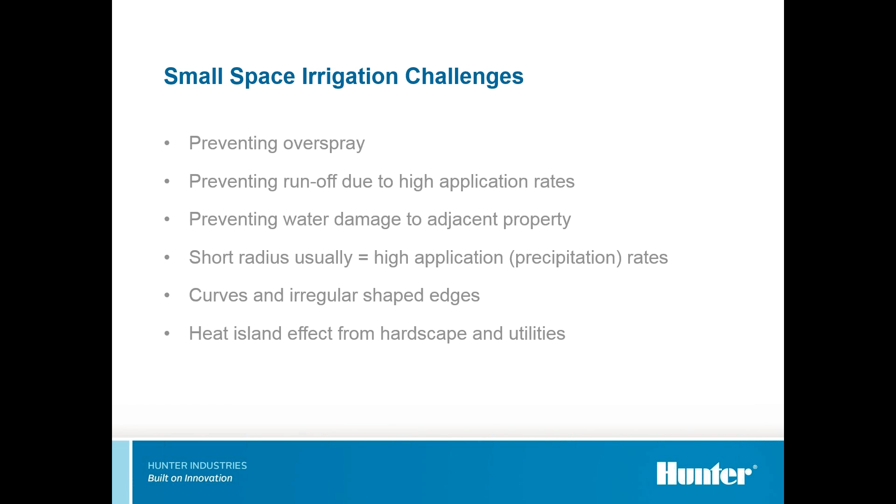And then the other thing is, when you get stuck into these small planter areas, I'm going to show you a few slides that you get this heat island effect where the hardscape heats up and starts radiating heat, and that can actually wick water out of your planter area. So we'll talk about that. Drainage issues, oftentimes, the water from the surrounding hardscape starts to collect in your small landscape planter area. So you got to make sure we got good drainage, and then how do we irrigate off of that?

Lots of equipment, because when you get into small spaces, you don't really have room, but you tend to have a more dense application of heads, so you end up having to fit this stuff into small spaces, and that can be tough. Of course, foot traffic, lots of people crossing through small spaces.

One of the things that's been brought up a lot is general understanding of where the sun's going to be and how to irrigate for those shadows, because oftentimes those can get you. So good design practices with plant types and proper application rates, I think, are important.

The things you want to look at first are your local ordinances. Here in California, we have AB 1881, which typically dictates where sprinklers and how we can design irrigation systems for different projects. And then you start looking at hydrozones, your plant water needs, and then you've got to have a realistic budget for your client.

As to how many valves can we actually have - what's the project going to be when it's done? Is it a small 2-apartment complex that we're designing, but it has 48 valves just because we have all these shade areas and stuff? So what's the budget that we're going to have, and how can we address that?

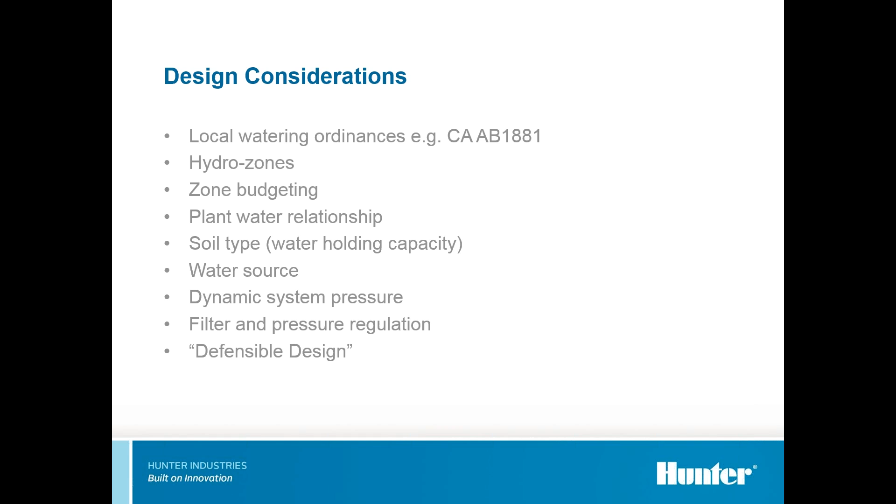And then defensible design - the last thing about defensible design, I think, is something that we all look at as designers. What's this project going to look like down the road, and how can I make it as bulletproof and simple for the maintenance contractor as possible? I think those are the key elements on some of these systems that we really got to take a look at.

And then looking long term, what's the mature plant size going to be? Do I need to do an extra row of heads down the middle because the mature shrubs are going to block the heads shooting in from the outside?

And then the big decision is, do we go overhead, with more of a spray or a rotator, or do we go with a drip installation? Once we get to the drip installation, are we going to go inline emitter tubing, point source emitter type of thing, or do we want to go subsurface?

So those are some of the other things we're going to talk about today. But I think the big thing is not only the defensible design concept, but also having specific, clear written notes and installation details showing exactly where you want this stuff installed, so that the contractors can bid it appropriately, and that you get what your client needs at the end of the project.

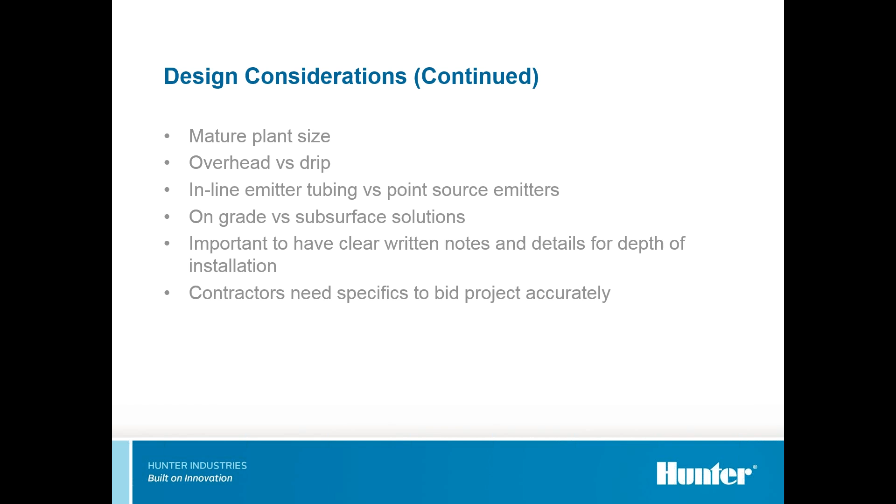And things as simple as doing subsurface - that's going to be one of the things we're going to cover. We've got to call out a temporary irrigation system if we need one, and that way it's bid, it's put on the legend clearly, and contractors can see it.

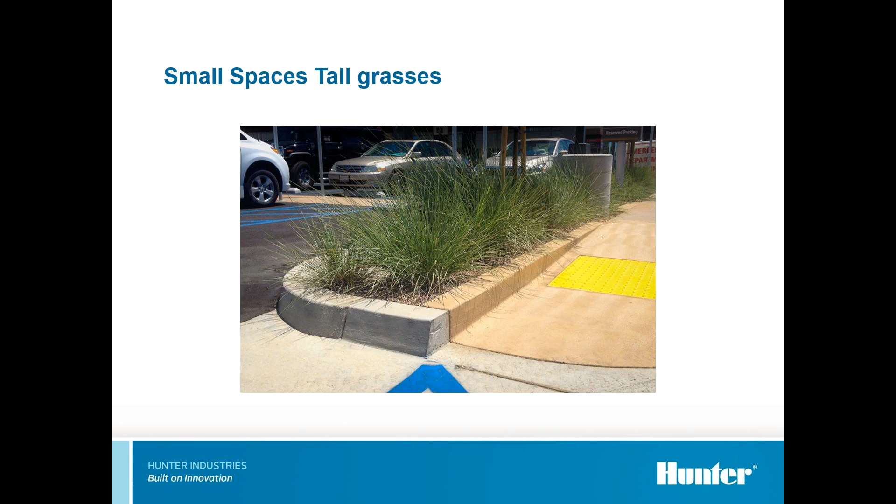This was a recently installed project, and this one's one of those small parking island medians. This was done really well. It actually used on-grade drip installation below bark mulch, and I think it was a great choice for the tall grasses, because with a spray head they might be getting obstructed by the grasses, and there's no runoff and no plant obstruction here. So this is a really good installation.

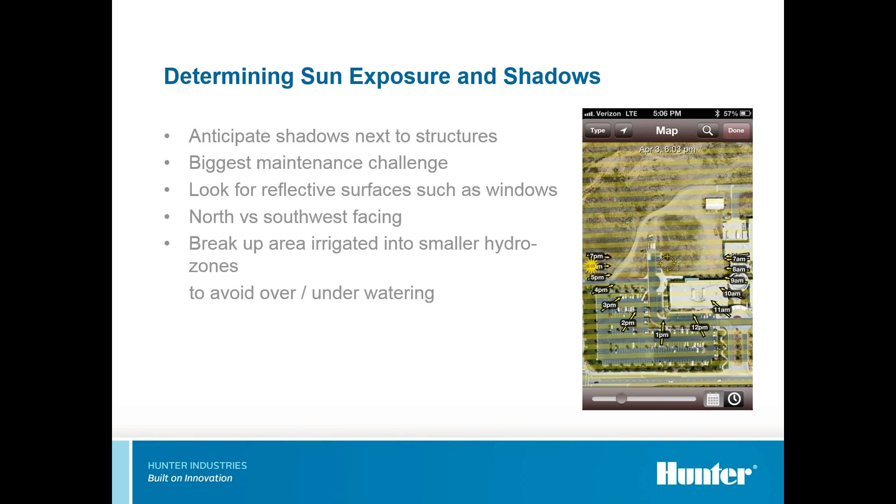You know, the big thing right now with a lot of the bigger clients is they want their landscapes to perform. So plant health is absolutely critical, and how these drought-tolerant plants look good year-round, you got to maintain that constant curb appeal. So choosing your irrigation based upon optimal plant health and how these plants want to be irrigated can take effect. That could be a big factor in your decision.

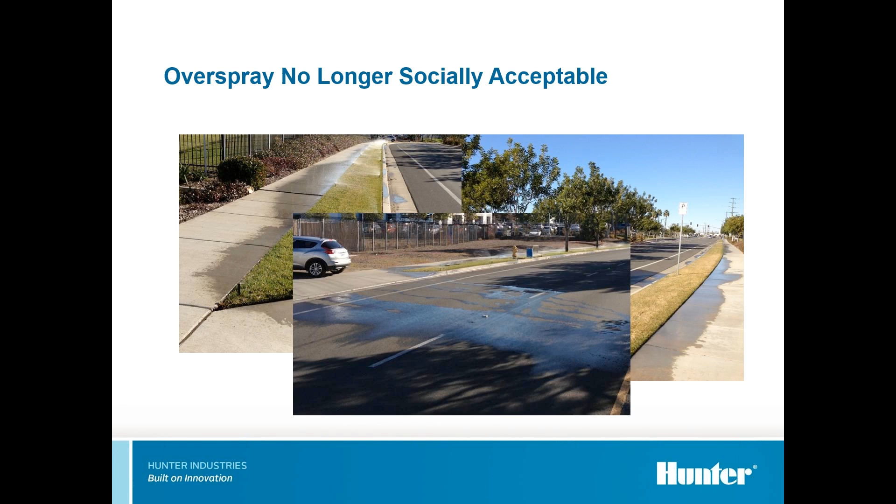So, some simple overhead solutions haven't always been the best. I don't think having as much spray in your walkways and hardscaped areas as you do in your landscape is definitely appropriate. I think the social acceptance of overspray is becoming less tolerant now, and we're starting to see these types of runoff situations as a real challenge, particularly for designers.

Overhead sources like sprays, you have options down to the 2-foot radius. They tend to have a higher application rate, and sprays tend to have a little bit lower efficiency than some of the other technologies out there.

But be advised that if you are using short radius sprinklers, you tend to have anywhere from 2 inches to 7 inches an hour precip rate. And if you look at what that is compared to your soil intake rate, you might be putting it down faster than the soil can absorb it. So that's a real important thing for maintenance personnel to understand, because they're going to need to cycle and soak those sprinklers. I would say that sprays are a pretty good choice for high traffic areas. If you're getting a lot of foot traffic, they retract, they're out of the way, they're pretty robust.

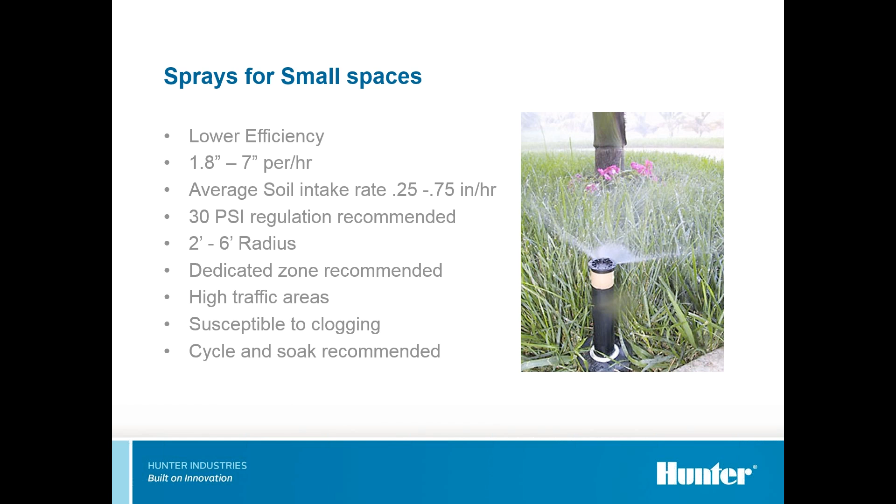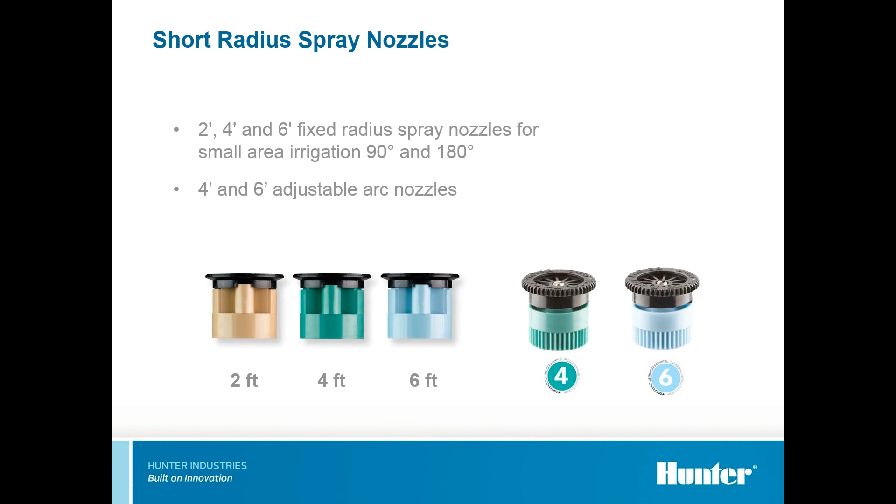But you know, the smaller the spray, the more susceptible they are to clogging. I'd also make mention of that too. You've got 2 to 6 foot short radius options, some adjustable options, and these generally work pretty well if you have a small area. Maybe you're spraying in toward a planter bed and you're not worried about the overspray as much.

I think when we get more into the high efficiency overhead, we're looking at low precipitation rate, slow application of water. The MP short radius was recently launched by Hunter Industries. We call it the MP800SR, and that stands for short radius. These would be mounted on a pop-up sprinkler or a riser mount sprinkler, and they rotate. If you've all seen a rotating sprinkler, an MP rotator, you're probably familiar with that. They tend to rotate and put out water very, very slow and controlled.

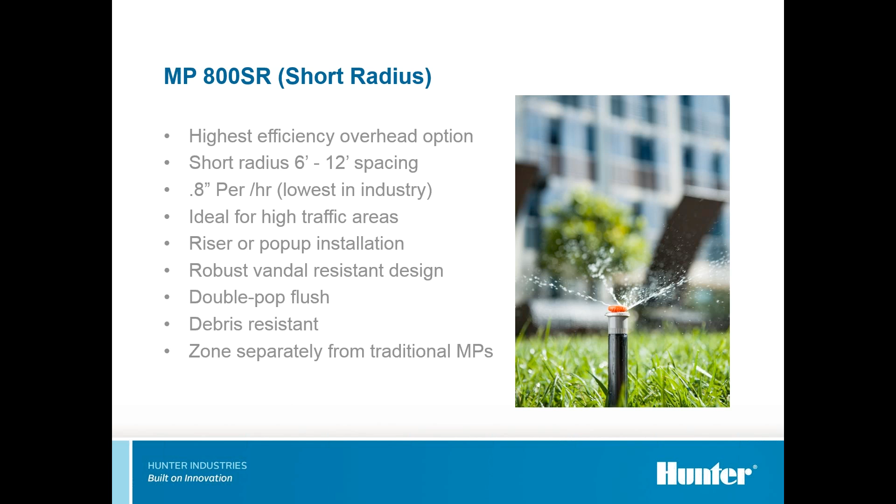So it's a good efficient way to put water down, and I think these are very robust because they flush themselves pretty good, so they don't tend to clog up, and of course they'll retract out of the way of any traffic. So one thing about the MP800, if you notice the precipitation rate, one of the things that we were tasked with doing was designing a short radius solution, but we also went with a 0.8 precip rate on this particular model sprinkler.

So you're at 0.8 inches an hour, which is exactly double the precip rate of a traditional MP 1000 or MP 2000. So the good news is your overall runtime for your sprinkler system is going to be cut in half, because it's going to be a little bit higher application rate, but it's also still going to be under that 1 inch an hour precipitation rate or application rate that we would look for low volume.

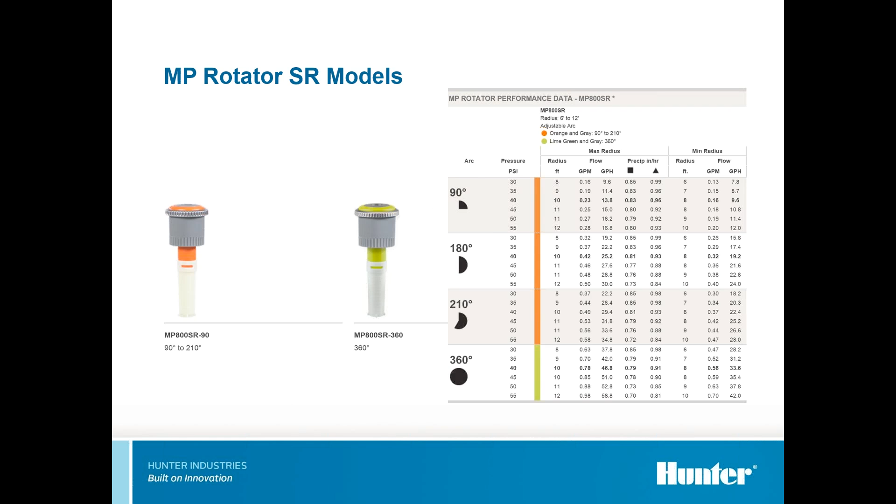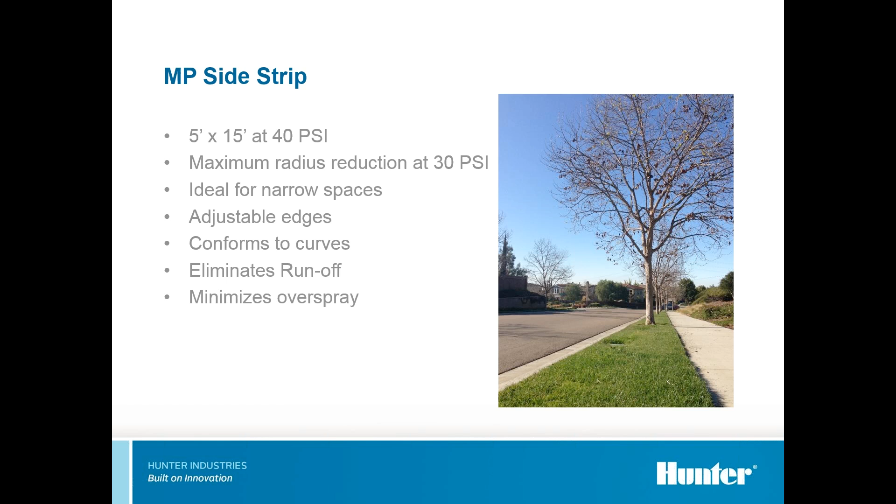And then we get into these side strips, these narrow strips of turf. You got a 5 by 15 foot nozzle, or a 5 by 30 foot side strip. These are pretty great to eliminate runoff, because again, we're watering with a rotator, which is controlled irrigation, and it helps to eliminate the overspray as well. So you've got 5 by 30 foot side strips and 5 by 15 foot corner strips, and when you put these together, you get a nice rectangular watering pattern.

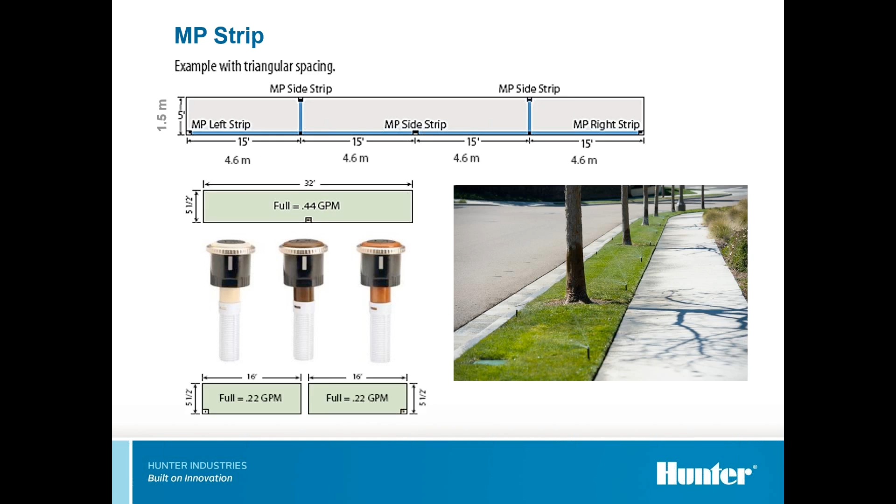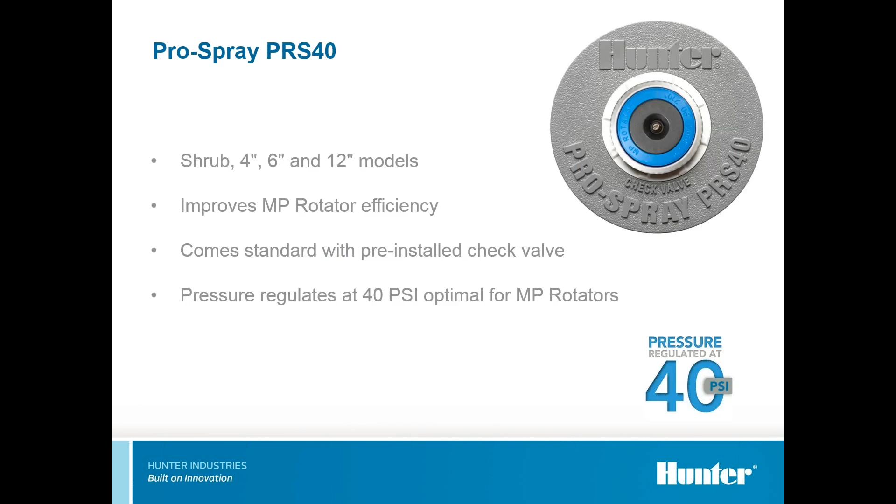When we're using MP rotators, traditionally, these rotating nozzles like 40 psi. That's what's optimal for the MP. The gray cap on the Pro Spray has a 40 psi indicator on top, and that means that the stem of the sprinkler is regulated to 40 psi. So you always have that consistent output.

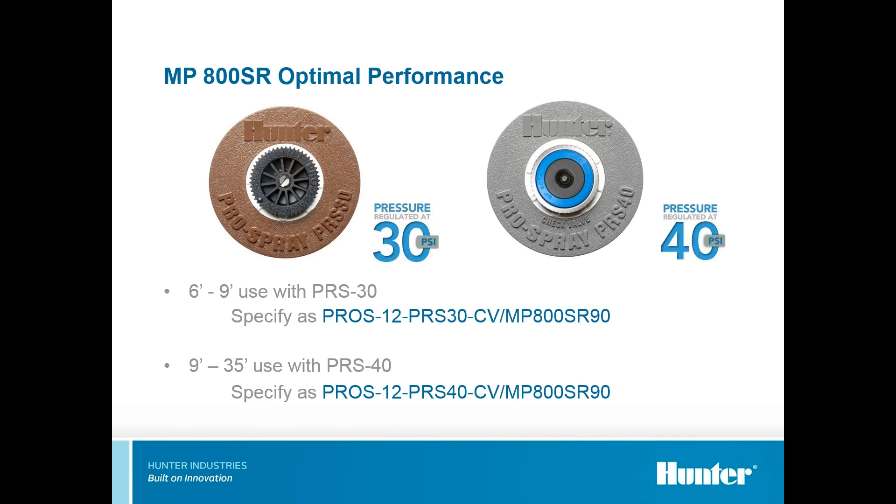When you get down into the short radius, this is another note. If you're used to designing with MPs, traditionally you're going to have them on 40 psi, but when you're trying to get down below 9 feet, that 6-foot radius and completely throttled down, you're going to want to recommend and specify those on 30 psi pop-ups, so you can adjust it down to the minimum radius. So that's kind of all for the overhead distribution of irrigation.

Getting into bubbler technology, pop-up bubblers tend to be a good way to go. These are your traditional bubblers here. They're going to be riser mounted on a Schedule 80 riser. Traditionally, they're going to be above ground, so it's something that you'll see, and it's potentially a trip hazard, so you want to be careful that you put them in low traffic areas.

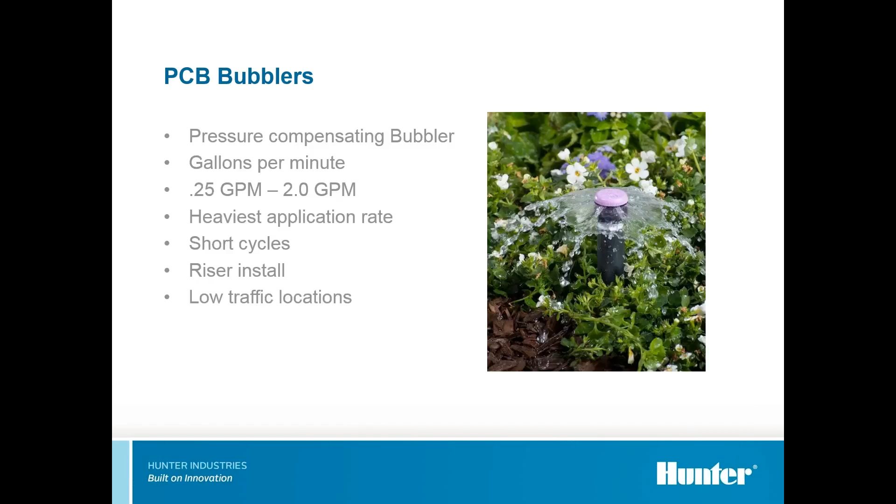But now we're in gallons per minute, so we're about a 1/4 gallon a minute to 2 gallons a minute, so it's a fairly high application rate, and you're going to want to do really short bursts of irrigation, short cycles on these to get the water in. And that's common with any bubbler nozzle, but bubblers are cool because they don't really put water out too far, and you can tuck them into small areas. So it's a good solution for low traffic areas.

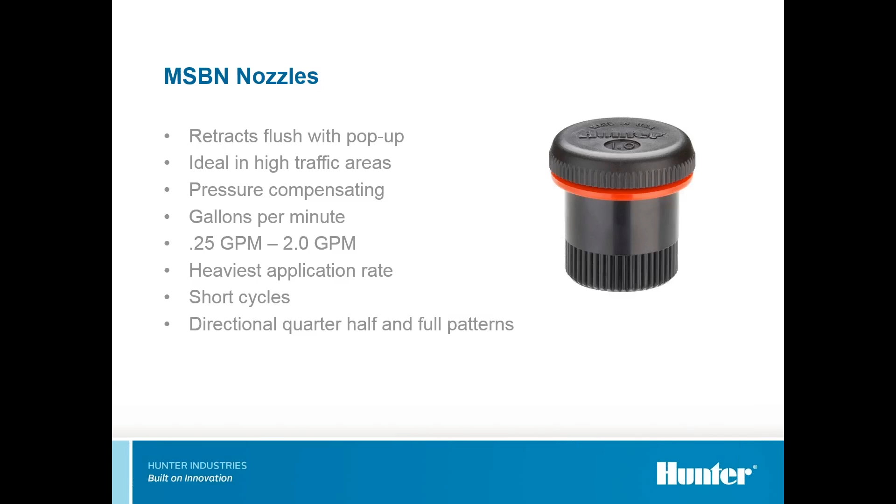And even better with that note would be the type of bubblers that retract onto the pop-ups. And these MSBN nozzles, multi-stream bubbler nozzles, same flow rates. Again, you get directional 1/4 and 1/2 patterns as well, or there's the full circle patterns if you want kind of that umbrella-shaped watering pattern. But you can get them in various flow rates, and they're color-coded so you know what you're applying. What's nice about this is they can't be tampered with, so that's always going to be the same flow rate, factory installed.

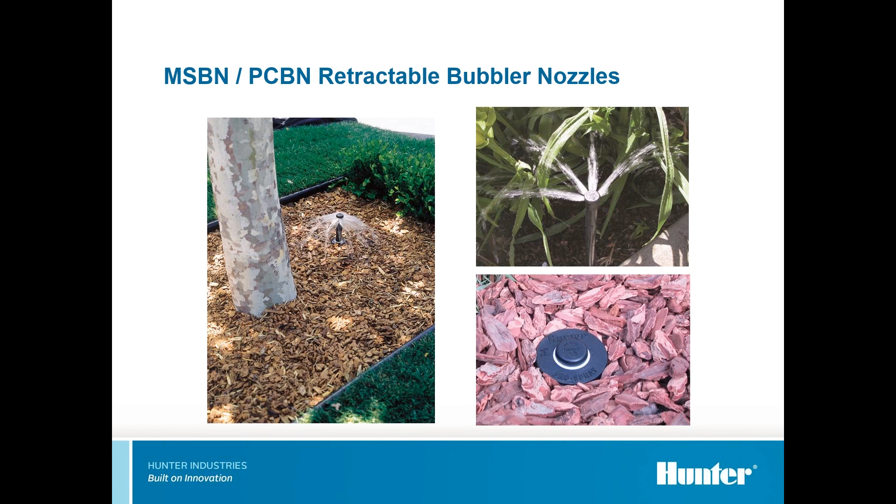And irrigating with these nozzles is kind of neat, because when it pops up, you can actually see it irrigating. You can see where that water pattern's going, and when it retracts, it's completely flush. So you could literally walk across this thing and not really know you stepped on a sprinkler if the sprinkler's at grade. So they're nice because they're directional, and you can kind of tuck them in.

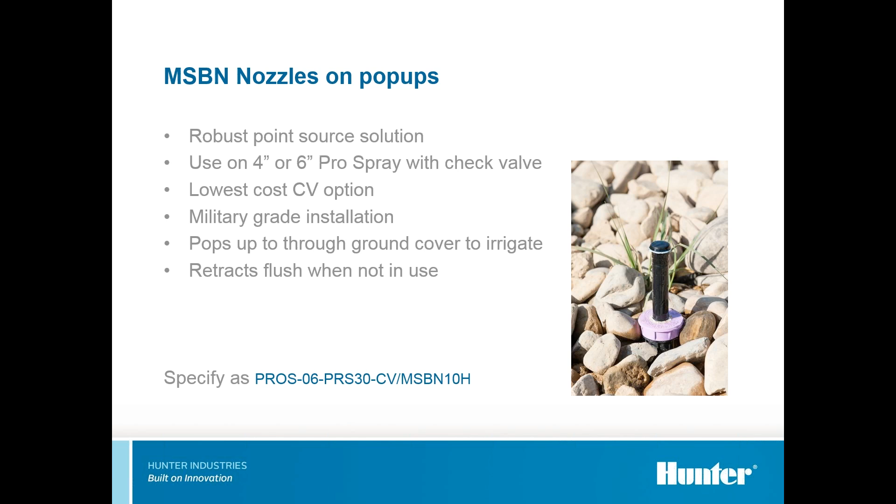Other ones I've started to see a lot more on military installations where they're using these versus a point source 1/2-inch poly pipe. It's a pretty rugged installation. This one is installed in cobble, and again, it's just in a parking median, so they know they're going to be cutting through on that.

And then some of these other strip areas where you're not quite a bubbler, I mentioned the center strip bubbler nozzles. This is kind of that bow tie watering pattern where it's a narrow strip of water about 2.5 feet wide with a 5-foot radius. So you space these things 5 feet on center in a linear planter bed. Again, it's more of a hard pipe installation.

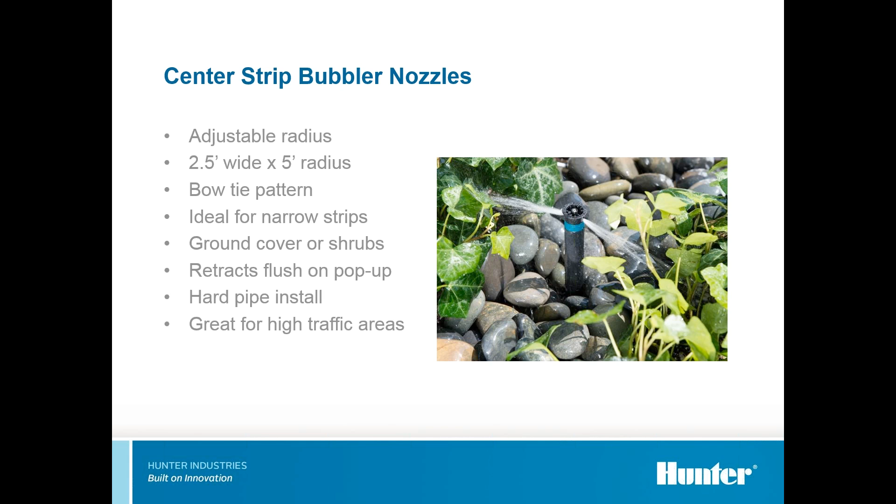It's an overhead installation, but it's great because they retract, they're out of the way, and if you need to get the water to kind of hydrate the foliage from the top, it's a good narrow space solution.

And then of course we get into micro sprays. These are commonly used in small gardens, more of a residential application because you're using a 1/4-inch poly pipe to distribute the water from a source. But good little sprinklers. I've seen them used on green roofs too, and they actually work pretty well on green roofs because you can get them down to about 2 foot.

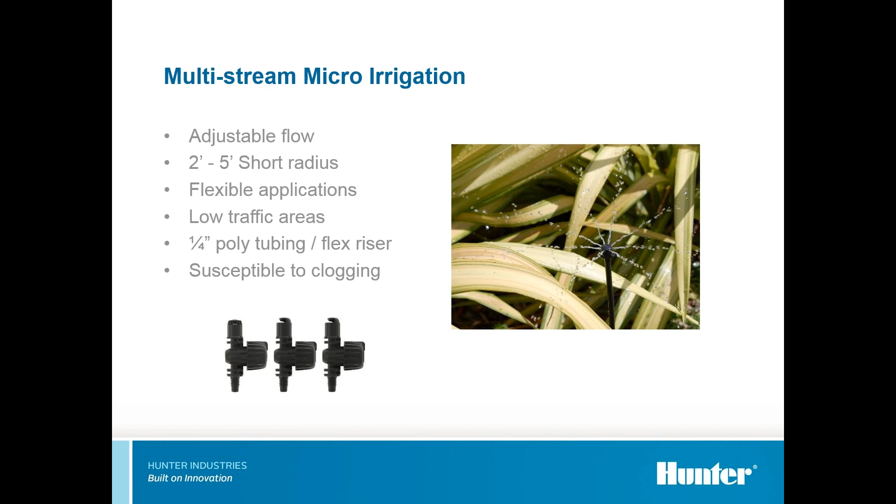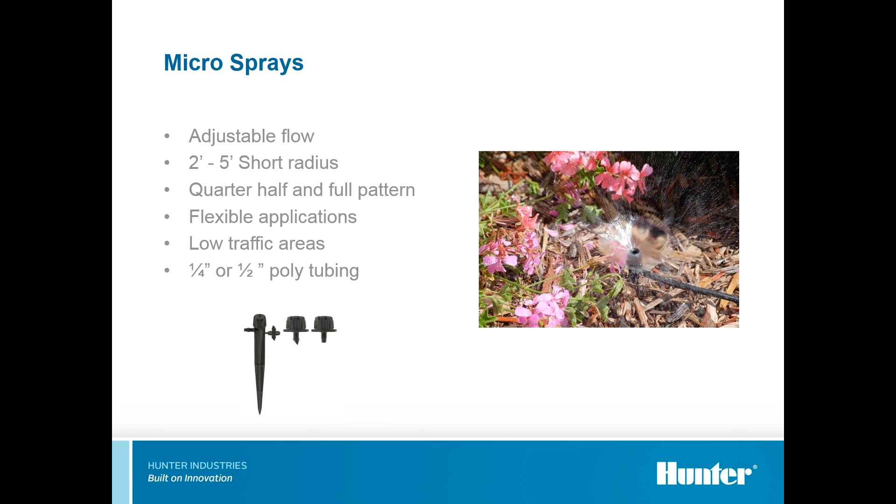But they are relatively susceptible to clogging, and you can just walk right up to them and adjust them. So you may not want that adjustability, or you may need that adjustability if you're doing your garden and want to be able to fine tune it. So again, more of the micro bubblers. These are definitely low traffic solutions, but they're very flexible. You can move it as the root ball grows and as the plants grow. So it's a good solution.

So that being said, we've kind of covered the bubbler solutions. Are there any questions up to this point? We did have a really good question on the valves, so if this is a good time to address that really quickly, or maybe it's a little bit off topic, but sorry, there you go.

Brandon was just saying that he's primarily having difficulty in finding valves that can handle these very low flows, and has a hard time splitting up the zones that are so small that it doesn't even have enough flow for the valve to function. And so if you have a product recommendation for that. Yeah, I think that's a really good point. I do have a couple slides in here that talk about valves.

And if you're going to a very small system with just a few heads on it, or very low flow bubbler or drip nozzles, you've got to have a low flow valve. It means that at the lower end of the range that the valve can perform, it can still close under low flows. I think that's really important, that you choose a valve, and I'm going to give you some examples of that in a minute.

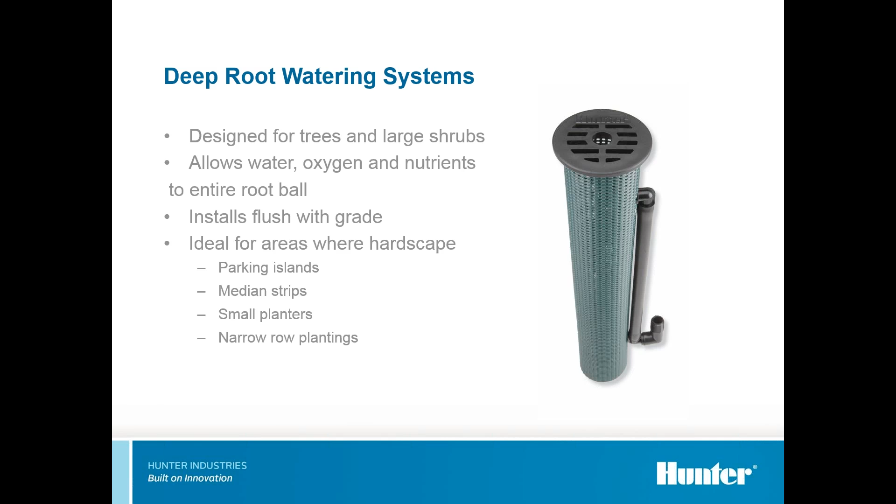Installs flush on grade. And it's great for parking medians and narrow little islands, planters where you don't have much space to put overhead sprinklers, but you've got to get some water down into those root balls. One of the unique advantages with this particular system is that it has baffles inside of it, so it directs the water at various heights and stages of the root ball. And that's kind of a neat thing.

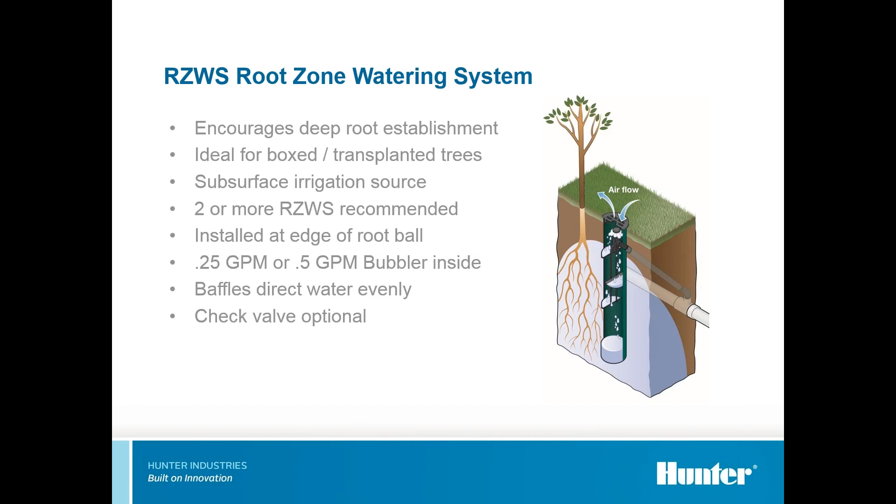But you really want to take a look at what your soils are. The soil is really important as to how well that water is going to infiltrate and how deep it's going to go into the soil. You probably want to do at least 2 per tree or large shrub, and if not 3 on an equilateral triangle spacing. They have check valves in them as well, so that's kind of a nice thing if you're on a slope. And this is what they look like installed.

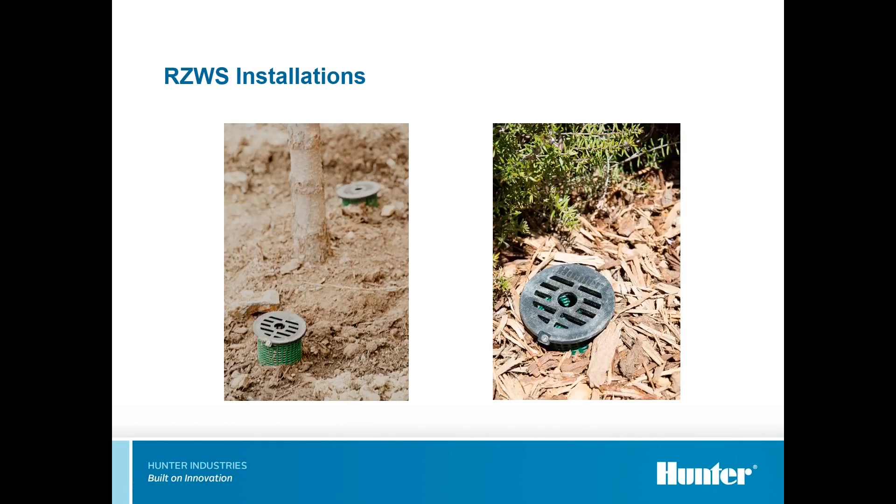You're putting them kind of at the edge of the root ball. If you're using a box tree or some sort of a transplanted tree, you're going to put it at the edge of that root ball and let it kind of soak in. However, what I've learned from doing some of these street trees is that depending on different soils, you're probably better going with a dual-purpose system where you have the deep root watering system and then some sort of a supplemental overhead watering system to get that water from the top down.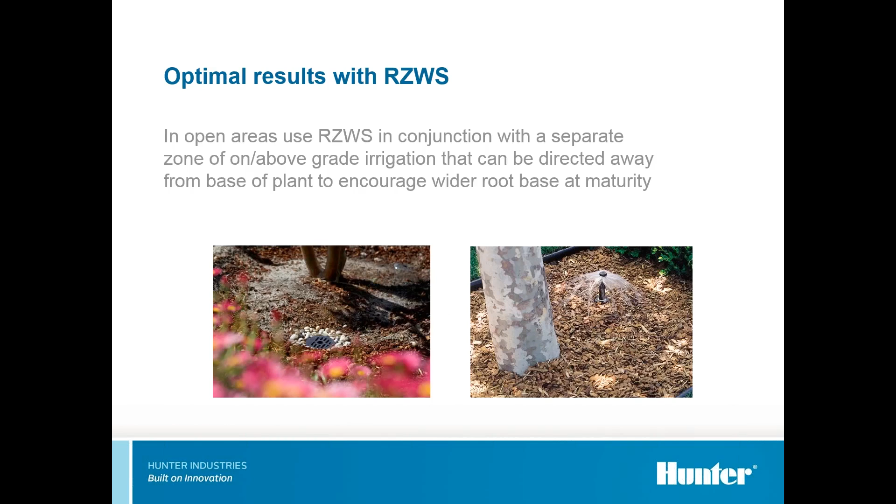So that turf grass water is going to supply water from the top, and then you're going to want the root watering below. But you want those to be on separate valves so you can control that and cut it off once the plant's mature.

And then, of course, getting to your slide about the low flow valves, the commercial grade valves that we offer, in this particular case, it's an ICV valve that has flows as low as a half a gallon per minute, and it'll go up to 15 gallons a minute. And anytime we're doing drip or bubbler type of systems, it's recommended that we use a filtration system. Even with a short radius MP rotator, because the filters are pretty tight on those MPs, I'd recommend a filter screen, about a 100 mesh filter screen.

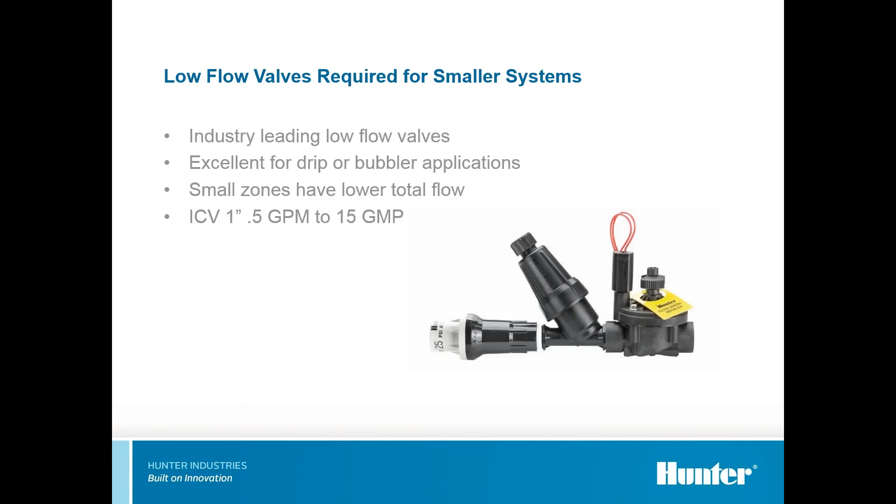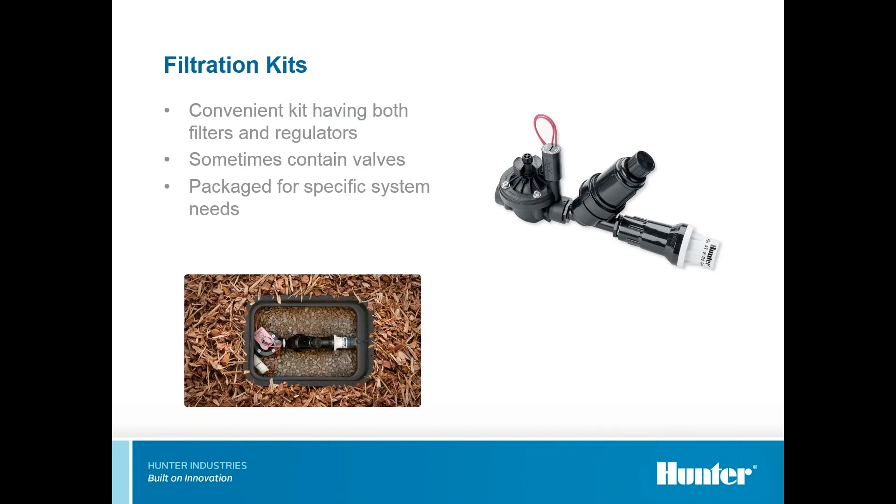And typically on these zones, when you have small spaces, you're going to want to pressure regulate, because a lot of times you've got a big water source, high pressure going into a small area, so you want pressure regulation. And there's different ways to do that, different drip zone kits available on the market. You want to make sure it fits in the valve box, and it's kind of a package system. This comes out of the box pre-assembled this way in this particular model valve, but like the question that was brought up, you definitely want to make sure that that valve will close with whatever your minimum flow is for that small zone that you're designing.

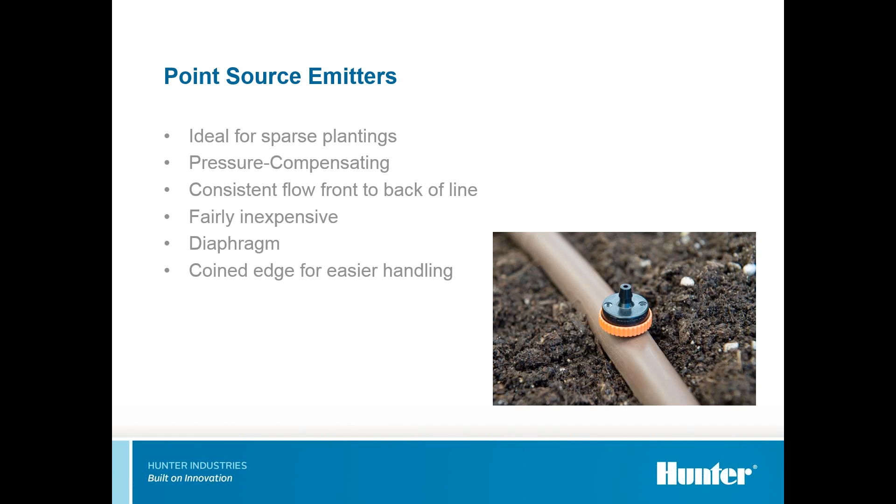So these emitters work sometimes through the use of a single smaller port to compensate for the pressure, and oftentimes they have a diaphragm in there that will go into place once the pressure is above, say, 8, 10, or 12 psi, something like that. All right.

Emitters take many different shapes and sizes. An example here is that you may have barbed, self-piercing barbs on certain emitters. You may have 10-32 threads. So depending on somebody's design style or the way you like to do drip irrigation, you may have an emitter on top of, say, a flex riser with the 10-32 threads. Or you may have a self-piercing barb.

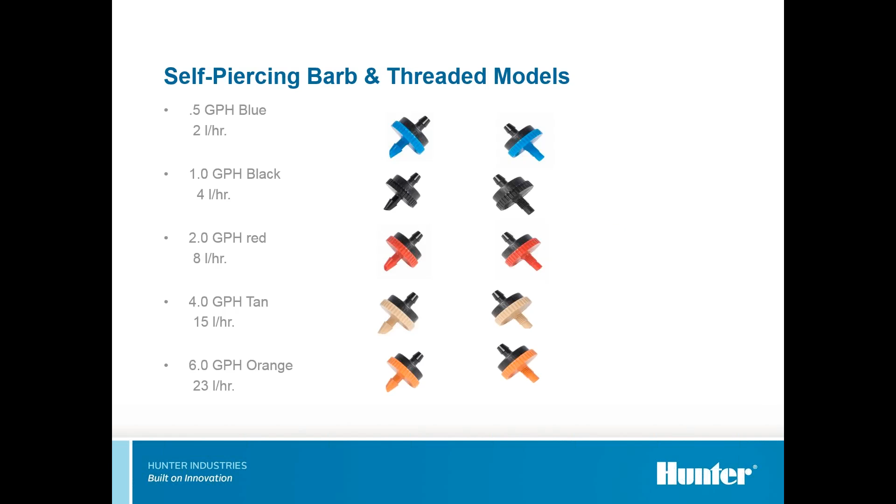That will be pierced right into a half-inch poly tubing, or it may have quarter-inch tubing leading up to it. Another method of doing that is a half-inch threaded type of emitter. You'll see these emitters out there as well. So it's going to be lower flow than, say, your standard bubbler.

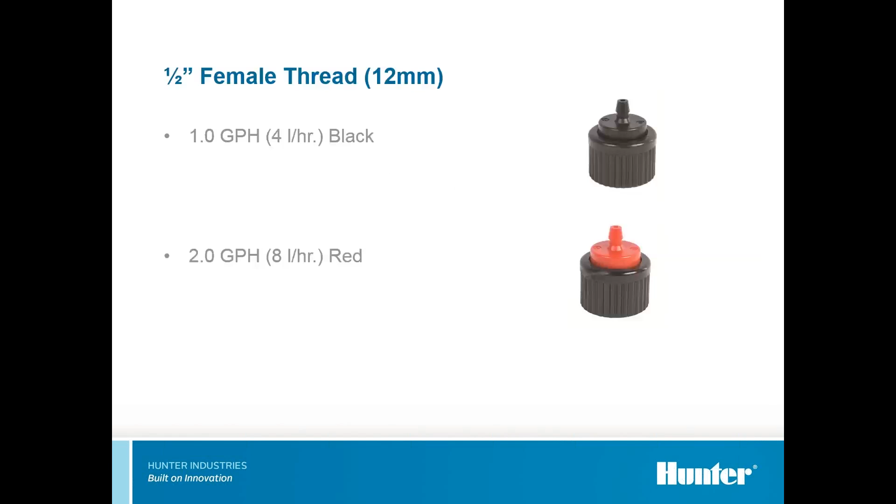So if you have a quarter gallon per minute as a bubbler, but based on the soil type, let's say you have a clay soil in a small area, you need a lower flow, but you do have a Schedule 80 riser or something like that. A lower flow 1 gallon or 2 gallon emitter with half-inch threading might be the appropriate solution for that.

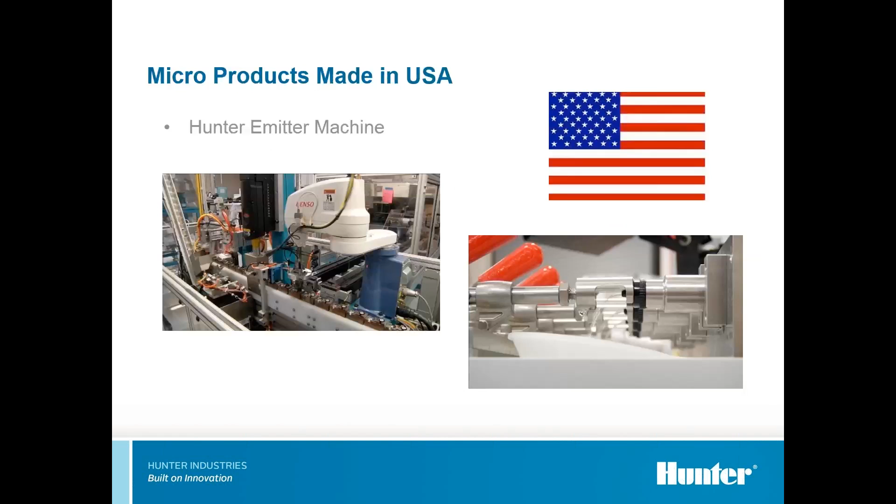Some drip irrigation terms. We've got application rate. So typically with drip irrigation, from emitters, microsprays, and that, we're going to measure in gallons per hour. Once we get to emitter line, where we're laying water down on the soil, either on the surface or subsurface, which we'll talk about as well, we can convert to an application rate so we can compare to sprays.

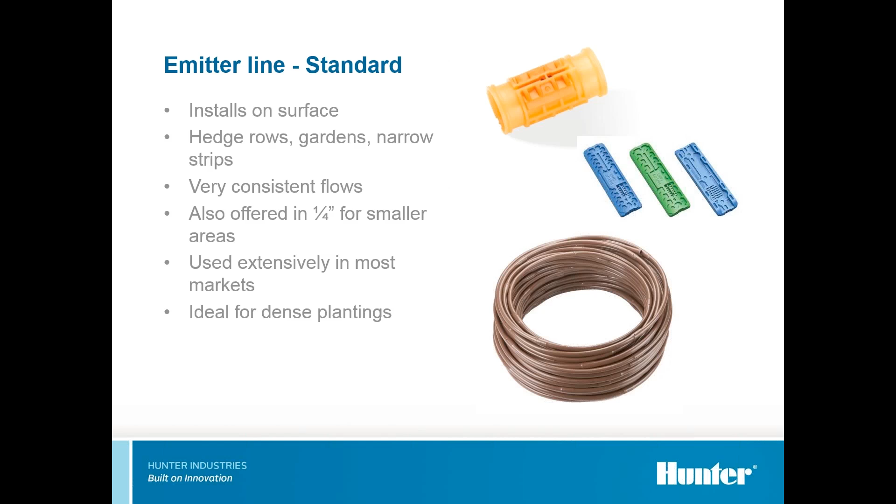Standard emitter lines are great for surface installation, hedgerows, gardens. There's consistent flows. It's also offered in 1/4 inch. Some of you may have seen 1/4 inch for potted plants in some very small gardens. This product's used extensively throughout most markets.

The Hunter PLD, our professional landscape drip line, similar to others that are out there, it is pressure compensating. We do have the check valve. We have some standard flows. We also have reclaimed product in purple, the non-potable color, and a 7-year warranty with the assorted fittings.

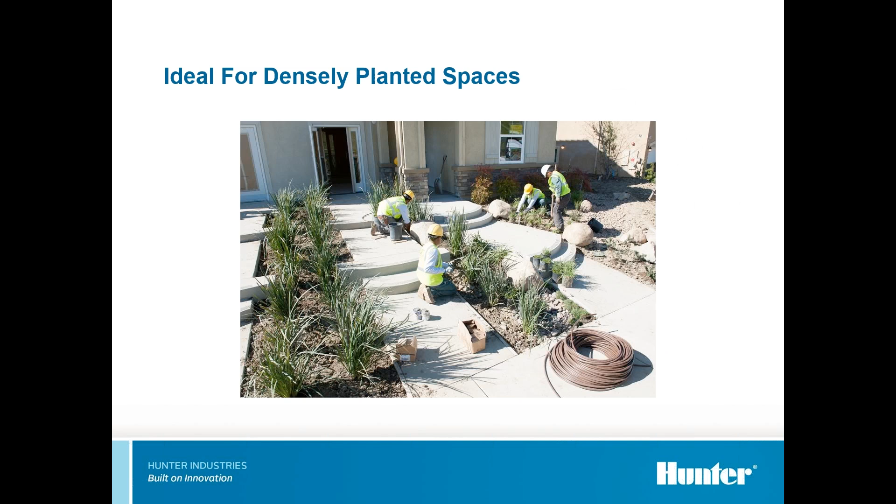All right, this is where it gets exciting for drip and for other products. When you have some densely planted areas, you can see the rows of these grasses. It's a perfect application to lay out some emitter line, is what the guys are doing here. Here's an example of one of those locations where they've staked it into the ground. They will mulch directly over that.

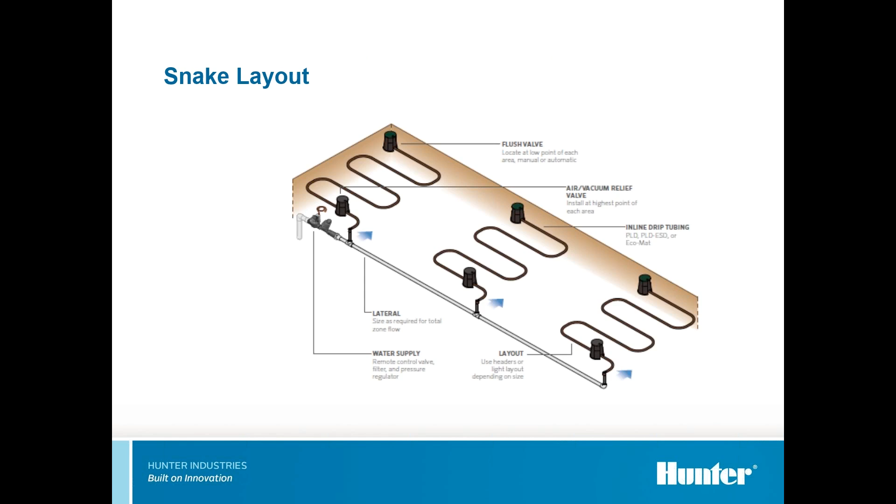All right, there are different kinds of layouts you can do with emitter line. You don't necessarily need to use fittings. The beauty of some of these products is they're flexible. You can go around corners, and you could certainly lay out something like this with a grid. However, I wanted to show you that you can also do what's called a snake layout. As long as you're covering the root zone areas of the plants, then this type of layout is good. Have a flush valve at the end, and it's rock solid.

Okay, standard on-grade drip. The beauty in this type of product on surface is that it is easy to install. You can cut down labor expenses. It's relatively inexpensive. It's simple to repair. Once you lay out the product, stake it down and cover it with mulch. You can always find it, and you can see it running and inspect that as needed.

Some of the issues are the water movement. You need to understand your soil. So in a finer soil, a clay soil, you'll want to use wider spacing. With the sandy soil, you need to know that the water is going to infiltrate the soil quicker, which I have a slide for. So understanding the soils is important with that.

Vandalism can always be an issue with any irrigation product in a public place. And the appearance: on occasion, drip tubing will pop up above the mulch. That's not so uncommon, so sometimes having appropriate stakes is a good thing. Also, this product, while it has been used subsurface, is not as effective for subsurface applications as some other products, which we'll go into at this point.

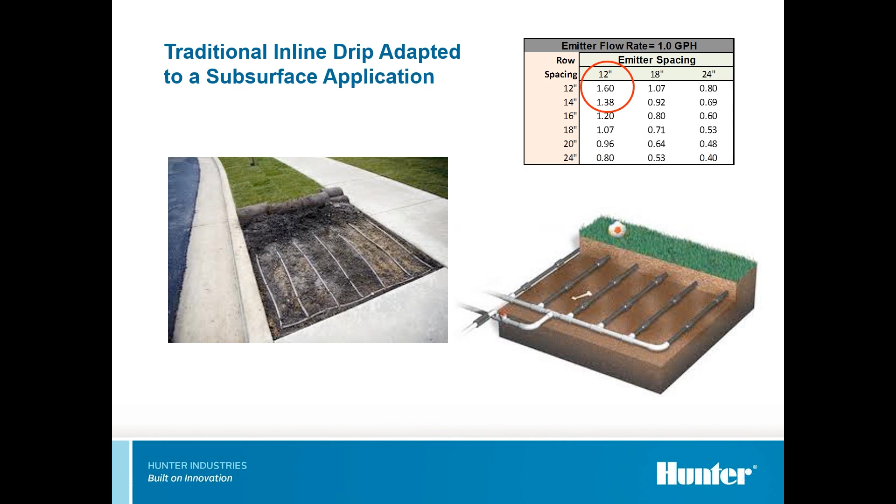This is one example of how that has been done. You can see the soil there—it's a pretty loamy soil, clay, with even spacing. One thing to note here is the precipitation rate. The application rate for 12-inch by 12-inch spacing is actually fairly high. What Chris had shown you earlier is with our MP rotators, we have a 0.8 or 0.4 application rate. With drip irrigation, it's easy to assume we have lower application rates because we have small flowing emitters, but as you lay out a grid, you can actually have a higher application rate. So you need to be aware of the soils and the run times associated with it.

A traditional inline drip wetting pattern—this is just to show the wetting. If that was in one of the beds I showed you with a few plants next to the street, this would work appropriately for above ground. If this was underground, you'd take into consideration the application rate and how long it will take for those wet spots to connect, and it's not necessarily the best application for subsurface. But this is a typical pattern for any standard emitter line that's laid out.

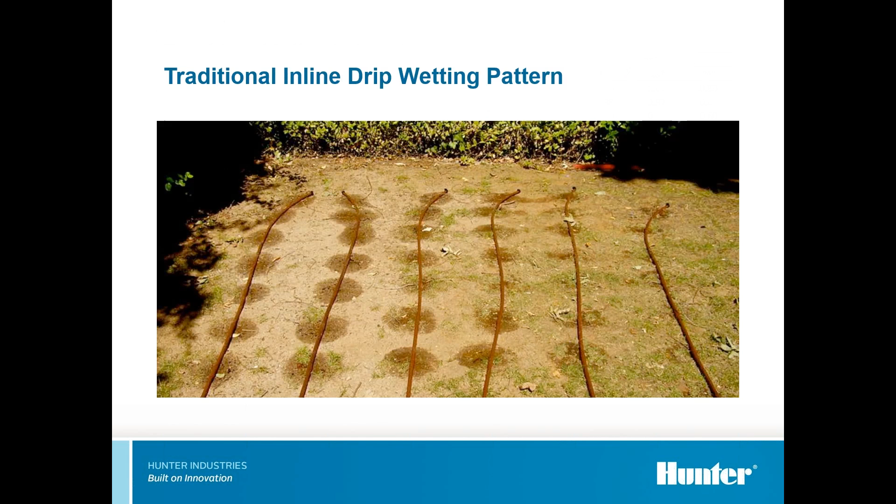Here are two examples of soil and water infiltration. For a sandy soil on the left, you'll see it percolates quickly—the water movement is fairly fast and goes straight down without much horizontal movement. With the clay soil, you'll see a lot more horizontal movement and spreading, and it takes more time for the water to infiltrate compared to the sandy soil. For this reason, with a sandy soil we definitely want 12-inch spacing to ensure water meets water between the emitters. On a clay soil, you don't need that—in fact it's not appropriate. You're going to want 18-inch up to 24-inch spacing, perhaps.

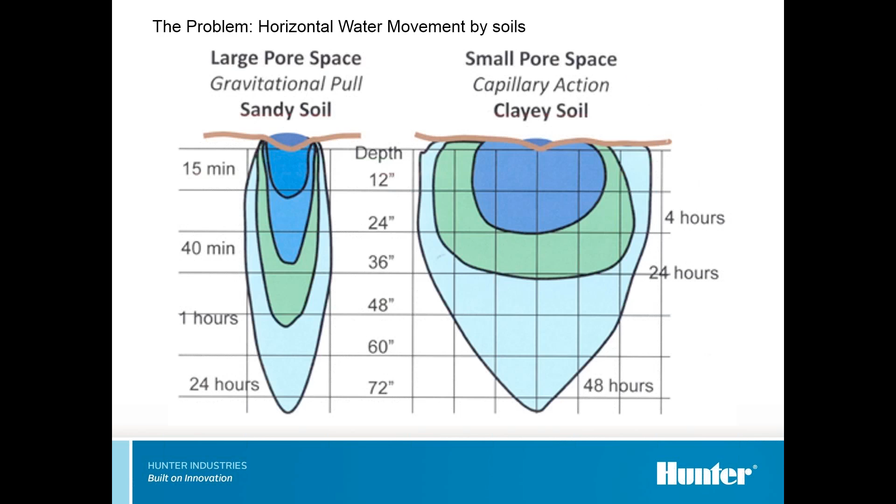What we offer for subsurface is called the EcoMat and the PLD ESD. The PLD ESD is a fleece-wrapped emitter line, and what this allows you to do is have the emitter drip and spread the water evenly throughout the fleece wrapping. That wrapping is also attached to our EcoMat, and extends that fleece out. The EcoMat is 32 inches wide, so you lay it out in layers like a carpet on a floor. The emitter line pours water into the tube, it spreads throughout the mat, and it has a water holding capacity of about 0.5 gallons per square yard. This allows a wonderful diffusion of water throughout the entire area. The efficiency is unmatched, and it allows roots to grow down to meet the mat, or sometimes grow through it—it's a great way to water subsurface, whether for turf grass, perennials, or small shrubs.

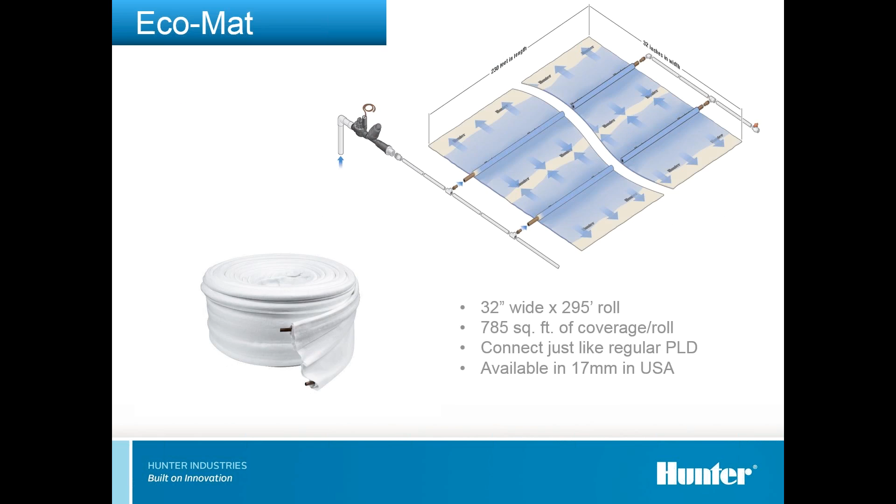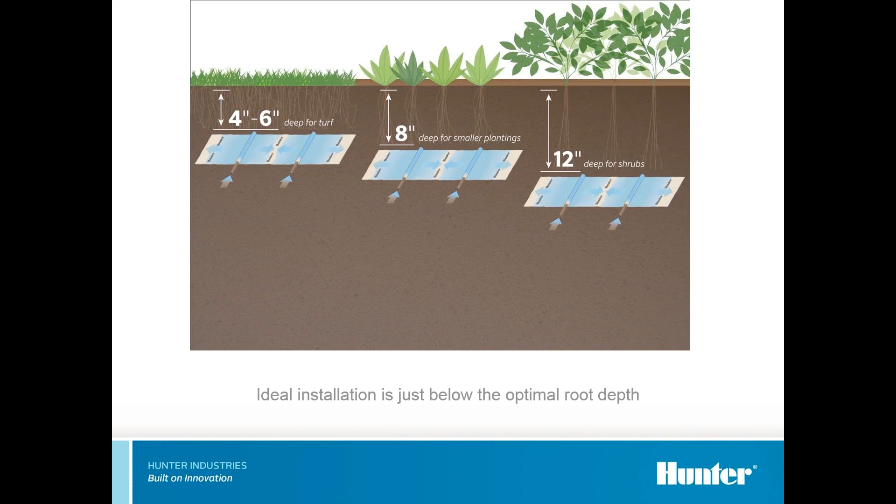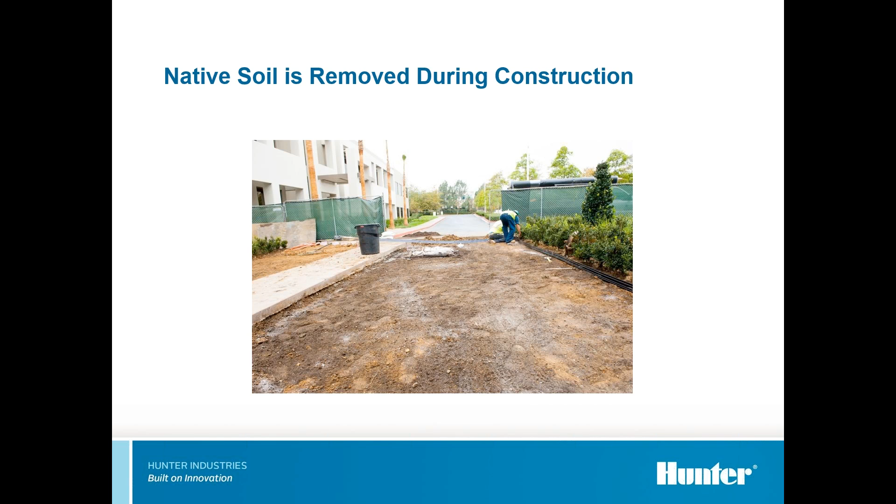This is a cool from start to finish construction. The native soil is removed. They left it with a 6-inch depth to be able to install the EcoMat, add some soil on top, and put in the sod. These are some installation photos.

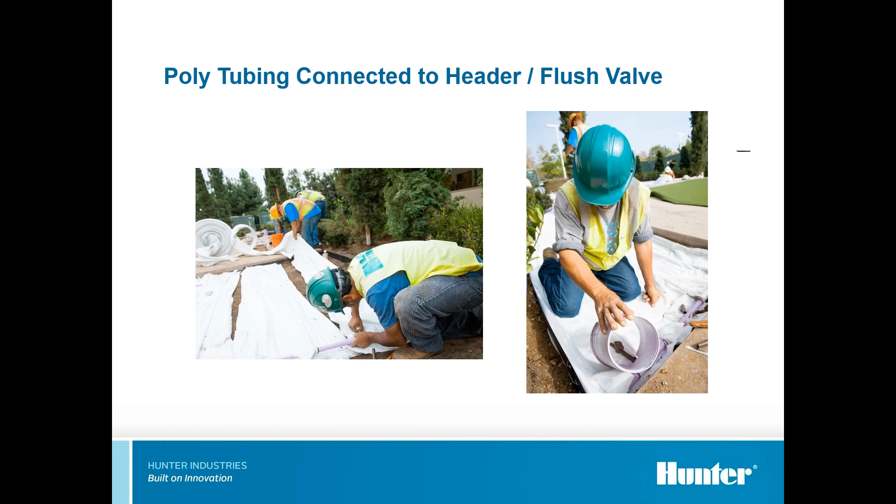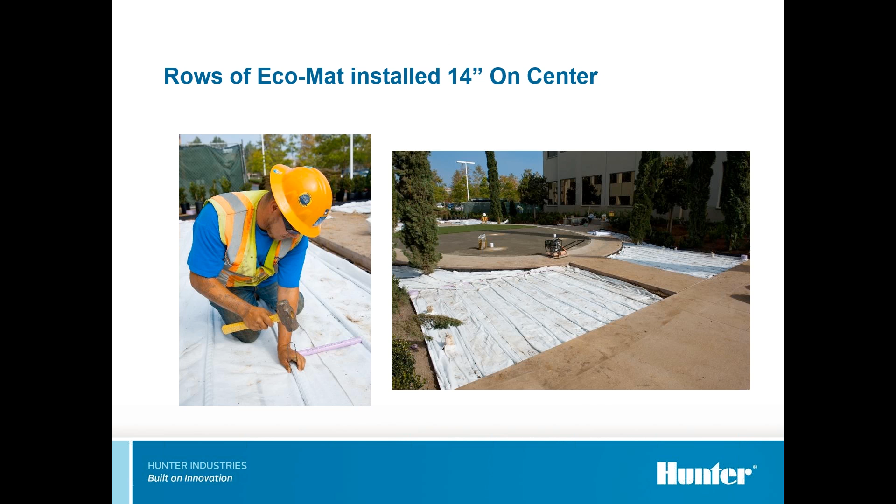Putting in some tacks or something to keep it down isn't necessary, but I recommend it. As you're pouring in soil and that sort of thing, it's possible to pull a lip up, so tacking some of it down is a good idea.

And the finished product on the right. It's a great application for this in particular. You'll see the walkways in areas that we just don't want to overspray.

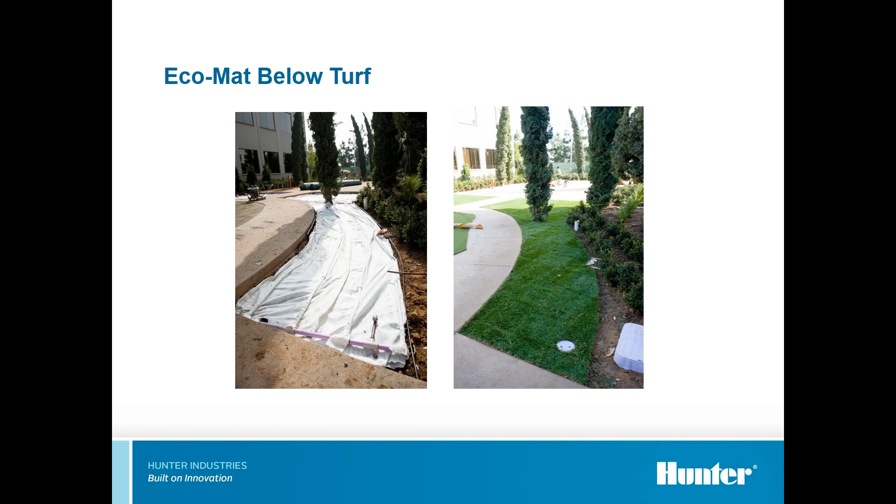You'll also see on the left picture there's a purple PVC sleeve. So we've got two things going here. They're obviously using non-potable, reclaimed water. At the same time, it's PVC, so they've established a good structure for this. It's not flexible, so they have a good starting point from which to lay out the eco-mat.

Filling it in, they'll need to compact that down just a little bit, and then they've got the finished product on the right.

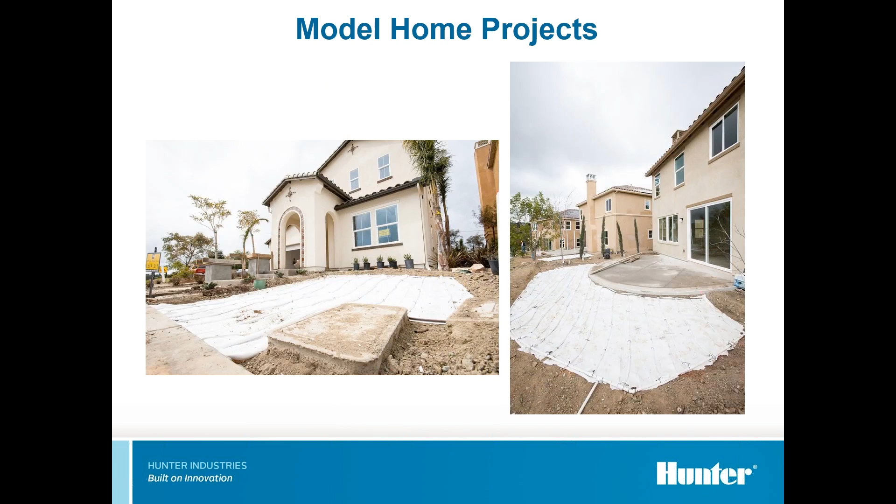All right, a few more photos of some model home projects that we've installed here. Nice outcome on all of these.

This is particularly difficult. You know, with the spray, as a drip guy, of course, I'm passionate about drip. I'm passionate about water conservation. But at the same time, there's those of us that do appreciate the overhead spray. We see it working. There's different reasons and logics for using overhead spray or bubblers or drip.

For this application, the eco-mat was a perfect fit for it. And you don't have to worry about sprays or having them go on when a car is sitting in the driveway.

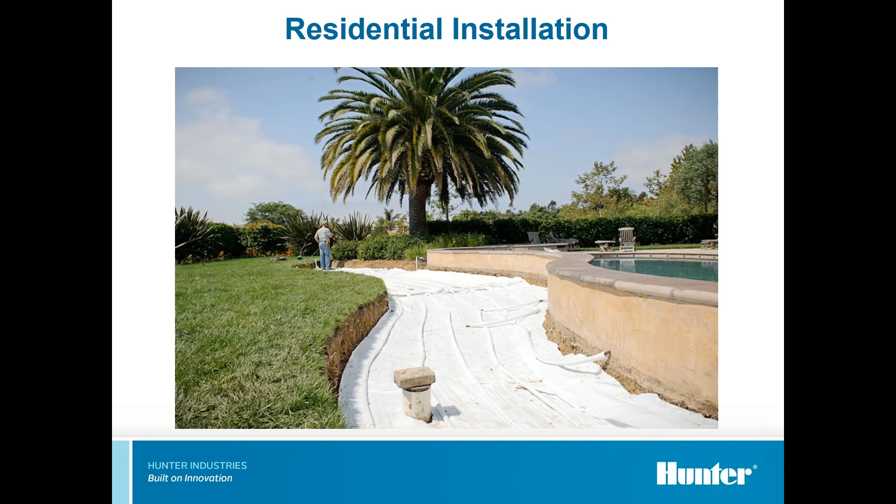Another home with the eco-mat project. This was installed fairly deep. We're going to install some plants here, which you'll see in a moment.

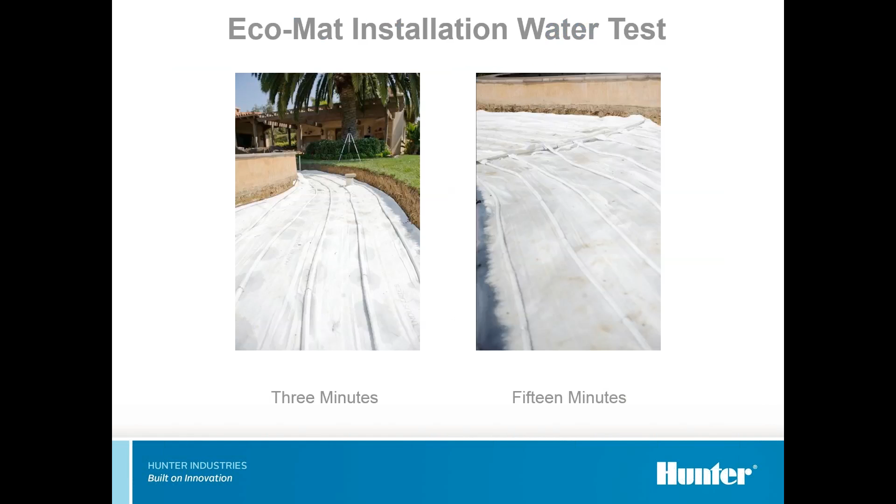Okay, some challenges to subsurface irrigation. It will be additional labor and material cost. For startup, we need to typically dig and amend the soil. It's relatively new, and managing the soil moisture is important as well. So having soil consistencies, ensuring that we have similar compaction is something that should be considered.

We do recommend soil moisture sensors. A fertigation system can be recommended with a lot of drip systems or irrigation, but with this, we definitely would recommend it. And sometimes, depending on the type of soil, you may want to install a temporary overhead. For example, with sandy soils, the water is going to infiltrate the soil quicker. It is a little bit more difficult to wick the water in a sandier soil than with the clay. So understanding that in your soils is important.

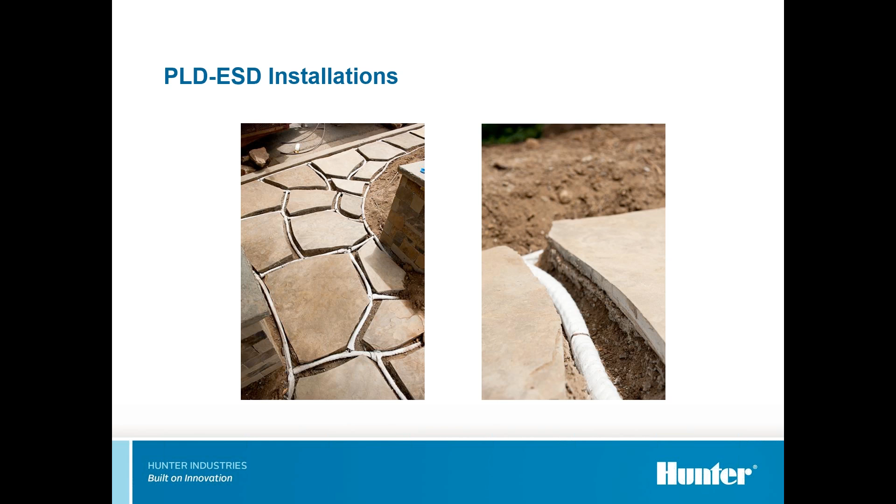Flagstone installations take a little additional work, but the overall effect after this install and design is real pretty and effective. Here's a photo with that. Certain driveways have this type of emitter line installed too. This one takes a lot of work, but if you've got time and the right people to do this, it's an intriguing project.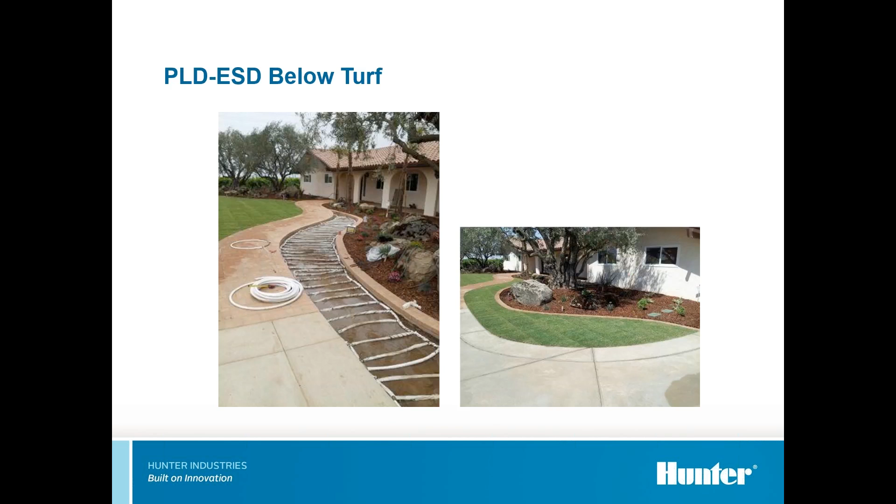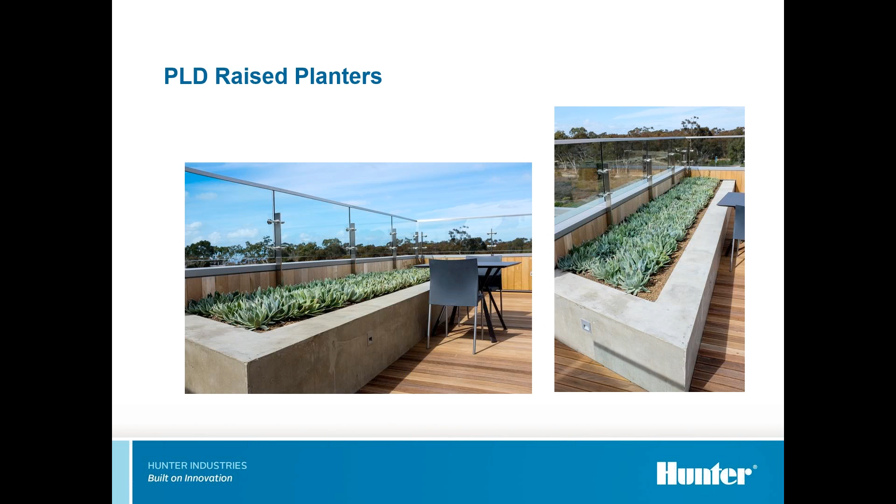Similar applications are perfect for subsurface emitter line. Rooftop gardens are great tight spaces for installing emitter line, same with drought-tolerant plants. For other areas, and now for green roofs, I'm going to switch back to Chris.

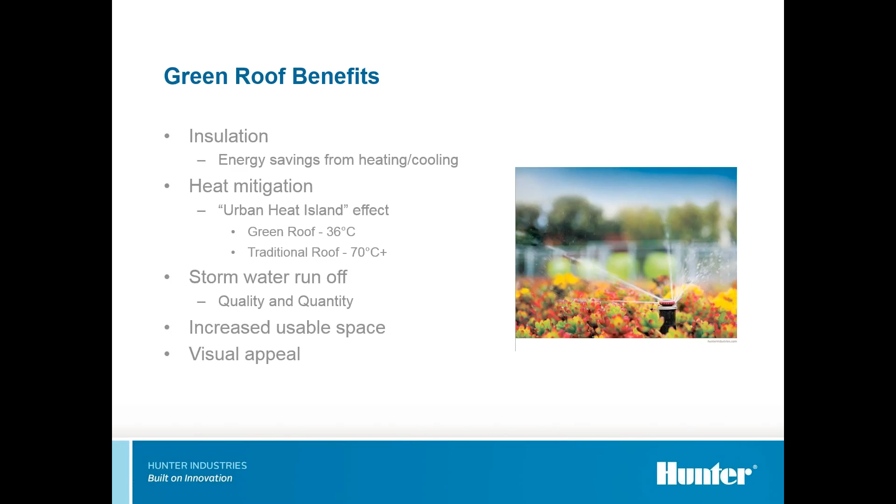Okay, well this was going to be kind of a teaser into green roofs anyway. There is so much that goes into irrigating green roofs. They're so different, and the structure of a green roof is different. But there are all these different reasons now that we want to do green roofs, for LEED buildings, heat mitigation, and obviously visual appeal - it's an attractive space. It gets a lot more complex because you have so many different layers of the roof, and you have to figure out where to put the irrigation and how much soil you're going to get.

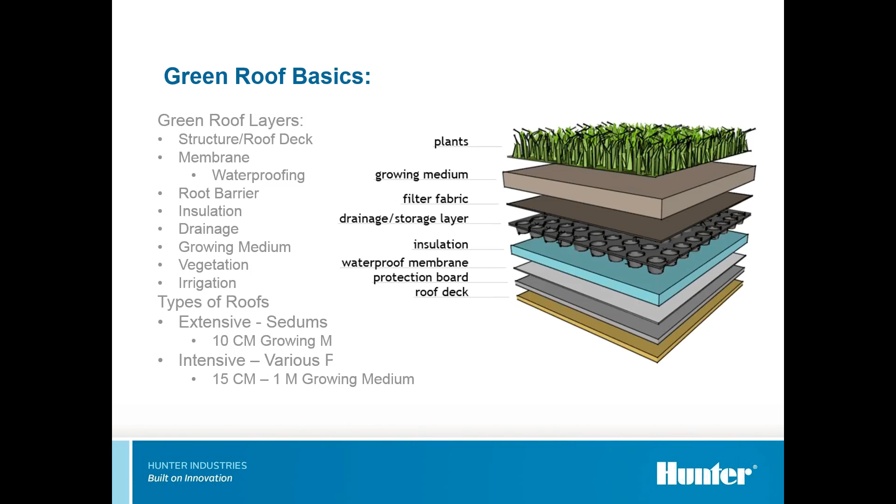Is it going to be an extensive roof or an intensive roof? Depending on those factors, that might determine whether you go with an overhead system or an in-ground system like an EcoMat. Like Rob said, the fleece fabric is great for green roofs because you have very porous soils - typically it's an engineered, really lightweight soil, and it's hard to get water to move across it if you're doing drip. But there are other things with green roofs; I'm going to skate through this real quick.

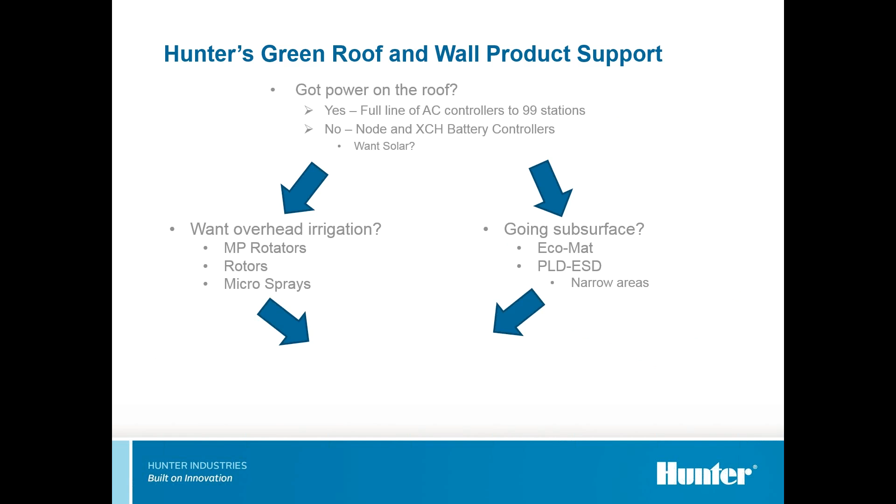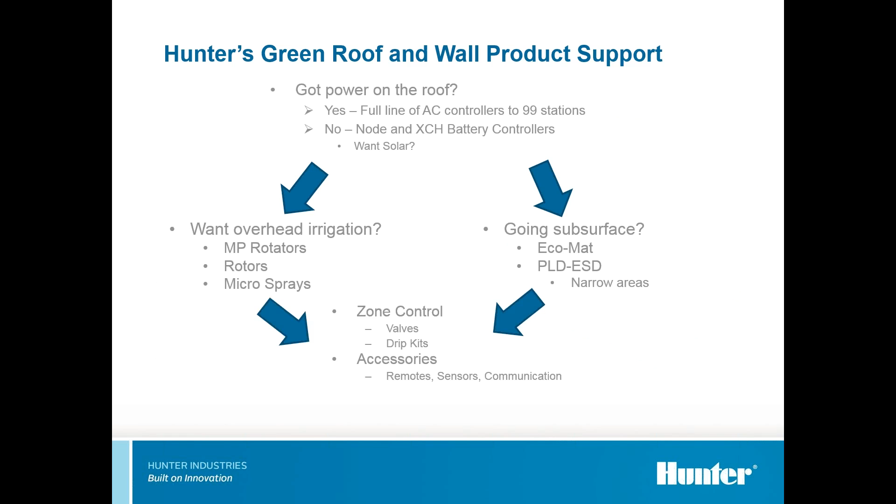You've got to figure out what your power supply is because you're up on a roof. Are you going to run a 2-wire decoder system all the way up to the top floor from the ground, or use a battery-powered or solar-powered controller? Then are you going overhead with an MP rotator or a rotor, or micro sprays? Or are you going with subsurface like an EcoMat or the PLD ESD on some of your narrower areas? And of course, for controlling it, that low flow valve is a very good comment - you need the drip kit, and then I'd recommend some sort of soil moisture sensor or something to help control it so you don't over-irrigate your roofs.

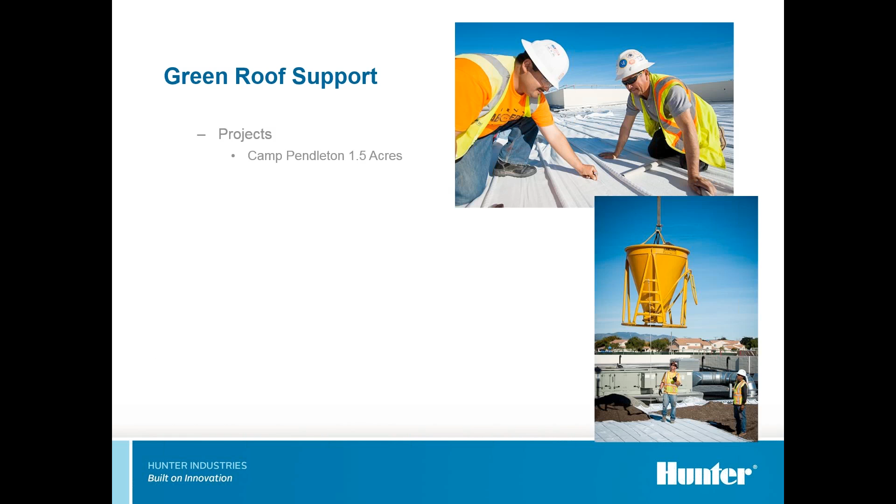It was an acre and a half of EcoMat used on a green roof, and again, you'll see that they're putting the soil down, putting the mat down over the top, tacking that down. You don't want to tack it too far because you don't want to hit the waterproof membrane, of course, because you're dealing with a green roof, and then of course bringing the soil in over the top.

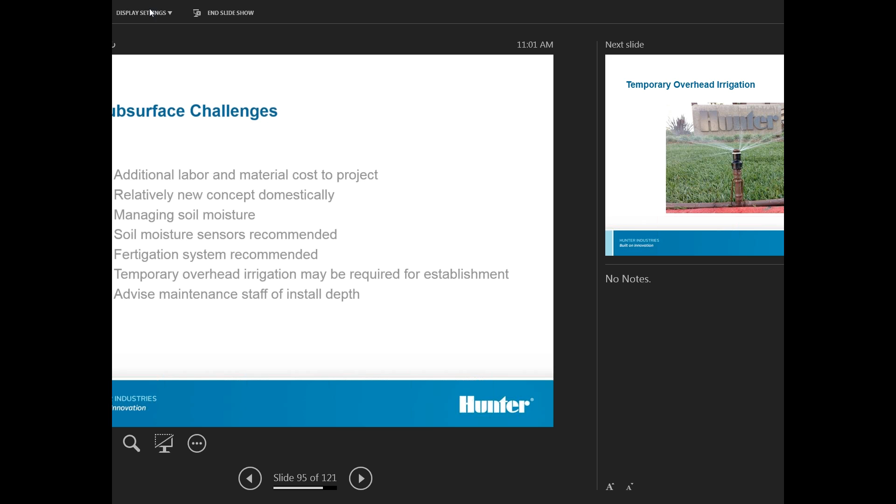Yeah, exactly. Those are good questions. Just like with any type of an installation here, I'm going to swap my screen, sorry, on this. Can you see that now?

Going back to some of the subsurface challenges, these are a lot of the questions that get brought up. If you compact the soil over the top of it, it's just going to be like any other installation. If you drive over turf, you can compact it. Again, we're watering from below, so with a compacted turf, the water's going into the root zone and actually kind of coming up into the soil.

So it's one of those things where I wouldn't recommend driving over turf in general, but you don't have to worry about compacted soil with water sitting on top trying to make its way through. You're still going to get that in there, but it's not good agronomic practice to have heavy compaction. And Rob mentioned a 4 to 6 inch install depth. I recommend if you can do a 6-inch install depth, that way you have access to still aerate your soil if in fact you need to.

So there are some maintenance challenges with regard to this stuff, because anytime we're going subsurface, it's a whole other, like you said, consistent series of questions regardless of what manufacturer and what type of product. You want to make sure you've got your fertigation systems in there. This slide here was taken from an interview I did with a very large national maintenance contractor, specifically about these subsurface systems that have been installed for almost a decade, and what their experience has been on them. So while it's still a relatively new concept for a lot of the maintenance contractors, they're getting it. It's there. It's just about us continuing to leverage the technology where it's appropriate.

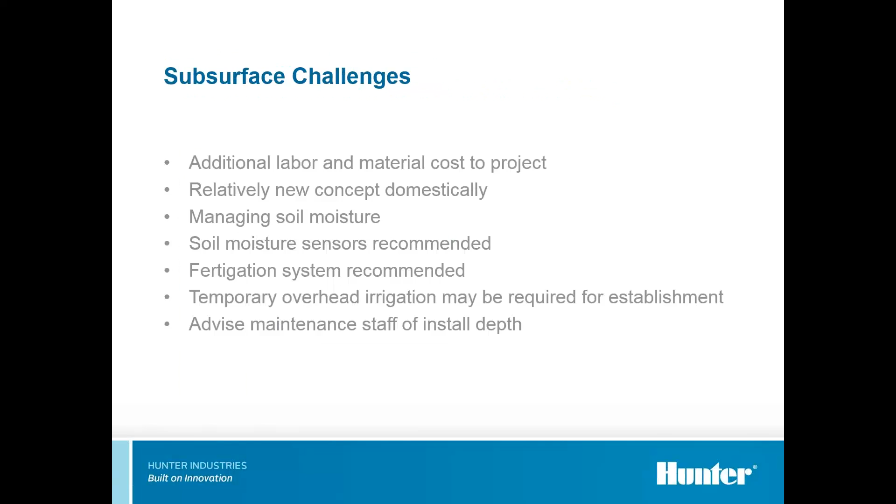Great. And then we had a couple of other questions back to the above grade emitters. Chris was wondering if you have a multi-port drip emitter, and also something similar to the Rain Bird Xeri-Pops. Yeah, currently we don't have a multi-port for the quarter-inch distribution tubing. Is that what you're looking for? I think that's what he's asking. We don't have one currently.

We're kind of expanding our drip offering. We started with products that were considerably different than what the market had. And as we get into the quarter-inch distribution tubing, kind of going backwards to what we were doing a lot in the 90s, you will see some sort of a distribution device like that. And as far as the Xeri-Pop, no, we don't have a product like that. But stay tuned. There's a lot more to come. Rob is diligently working on new innovations.

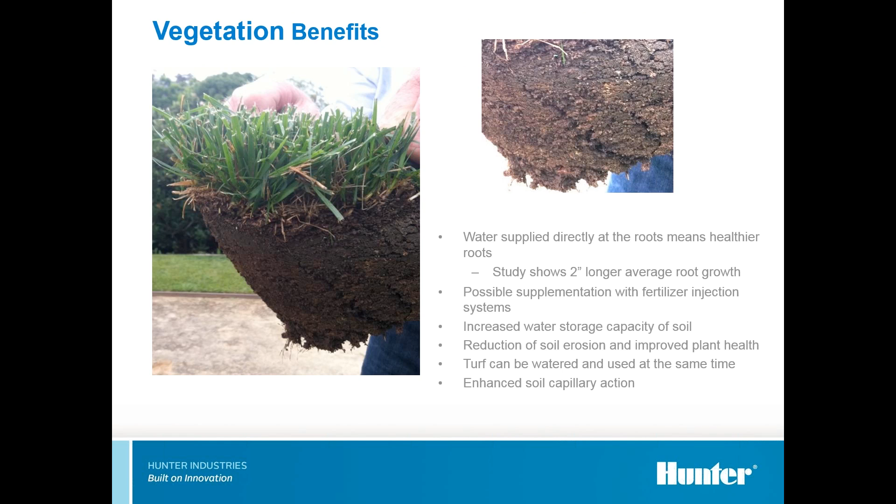Sure. And then one last question. If you could bring up the slide on the valve kit again. We had a couple of people wanting to see the valve information again, and particularly Chris with the sharp eyes here noticed that your slide said it was a 0.5 GPM minimum, but the website says 1, and so he was hoping to get a little clarification on that. Yeah, on the actual drip zone kit, that's a good call. The drip zone kit may be a 1.

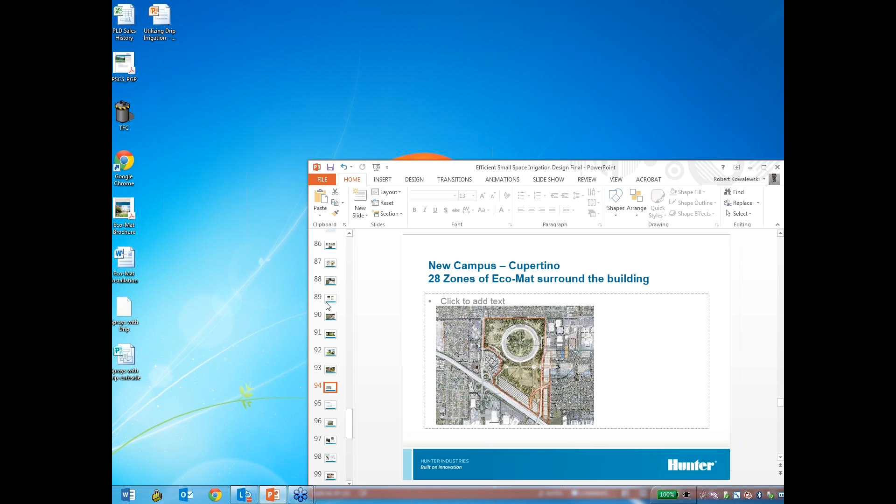I'm trying to remember where that slide is here. The website may call out for a 1 gallon per minute on the drip zone kit. However, the valve itself, the ICV valve that we're referring to, is 0.5 gallon per minute, I believe. So when we were referring to these bubbler systems here, you may not have a filter on there. Here it is right here.

Sorry about that. And then you might find on the ICV itself, on the drip zone kit, I'm seeing it called out, looking at the catalog, as 0.5 to 15 gallons per minute on the drip zone kit, which would be the ICZ and the PCZ. Gotcha. And that was my thought too. It's the kit. That's the additional flow to push through the filter there.

Yeah. We do also have a double barrel kit too, which is 1.5 inches, and that's also going to have a minimum. Our 1.5 inch drip zone kit is going to be 20 gallons a minute to 60 gallons a minute. But once you get through that pressure regulator and the filter, you start adding on friction after the valve, and so you are going to need a higher flow rate for the actual drip zone kit. I think he's correct on that.

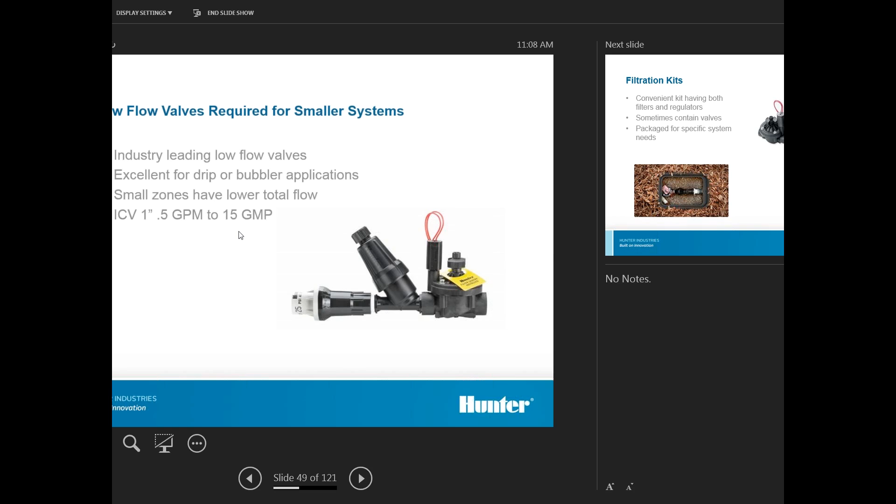Okay. Well, that pretty much rounds up the questions. As you and I were talking earlier this week, the vast majority of these questions were regarding subsurface irrigation. So I would like to tell the attendees here that we were talking about having Hunter present a subsurface irrigation webinar early next year. So I think we can all look forward to that. And I think that's pretty much all I have, if you have any closing comments.

Well, we'd just like to thank everybody for their time, and remind everybody that there are a variety of solutions, and you really want to look at your site and each project individually as to what's going to be the routine maintenance down the road, what's going to give the plants the best chance to live, and how we can irrigate these things efficiently, given the different options and tools we've given you today. So thank you guys for irrigating responsibly and using water wisely.